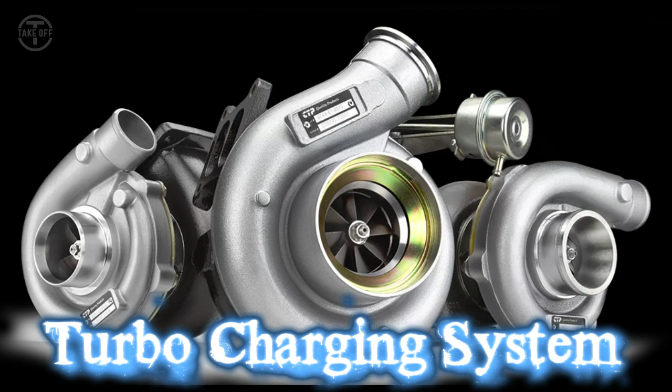Turbocharging is actually a pretty simple concept. The objective here is to convert the energy contained in your exhaust stream, which would normally go to waste, into positive pressure within the intake manifold, forcing air into the engine and thus producing more power.

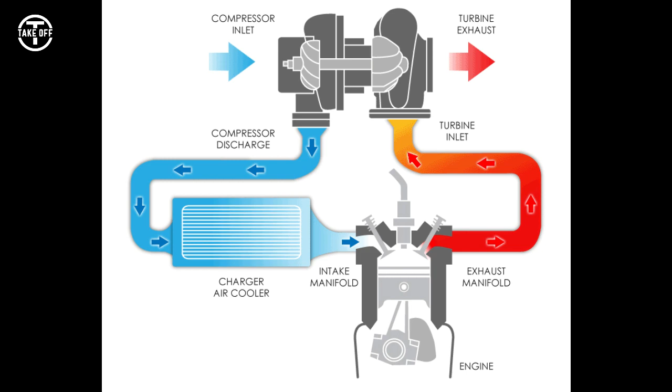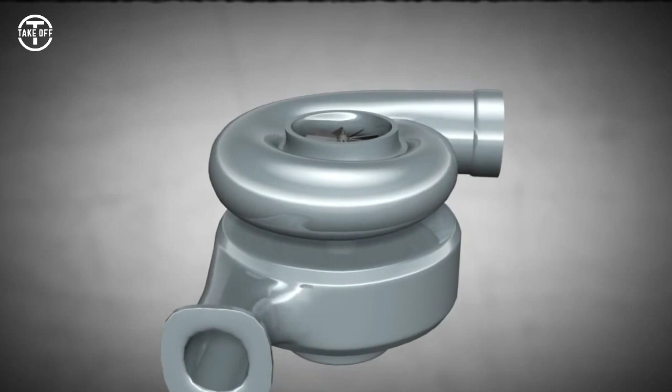The turbine. Basically, the turbine takes excess heat and pressure from the engine and turns it into a force. Without this element, the wheel would not work. There are two different parts of this specific element of the turbocharger. The turbocharger must have the correct turbine.

If the turbine is too small for the engine, it would cause excessive back pressure, ultimately causing the engine to choke and lose power. If the turbine is too large, it will lag greatly and make it difficult for the booster going forward.

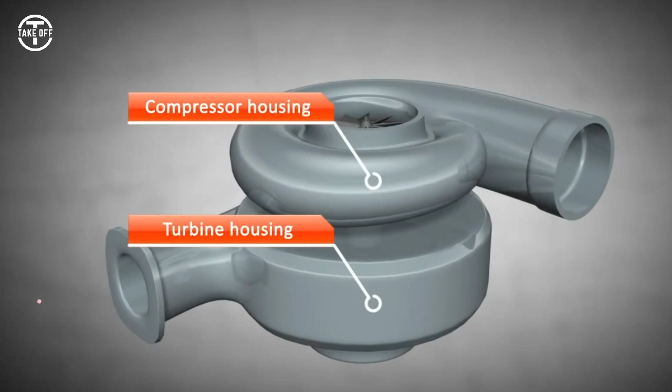The compressor. The compressor is one of the most common elements of the turbocharger that people know and understand. It's made up of two parts, the compressor wheel and compressor cover. Ultimately, what these two parts do is compress the air and move it into the throttle body.

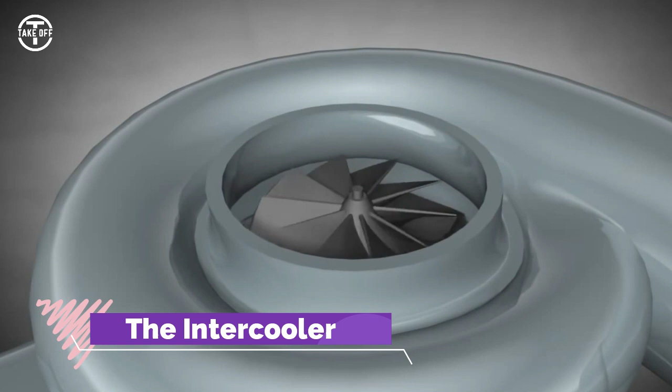The intercooler. This element is extremely important. The entire turbocharger product wouldn't be able to work correctly and safely without it. Basically, what the intercooler does is cool down the turbocharger's pressured air at intake. This is necessary because when the pressure increases, heat is created. An abundance of issues would occur, and too much heat can be harmful and dangerous.

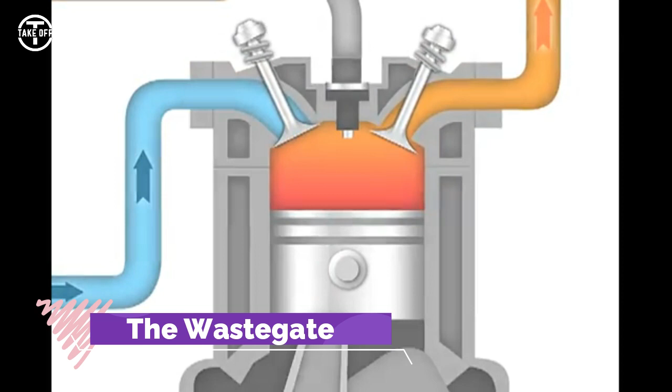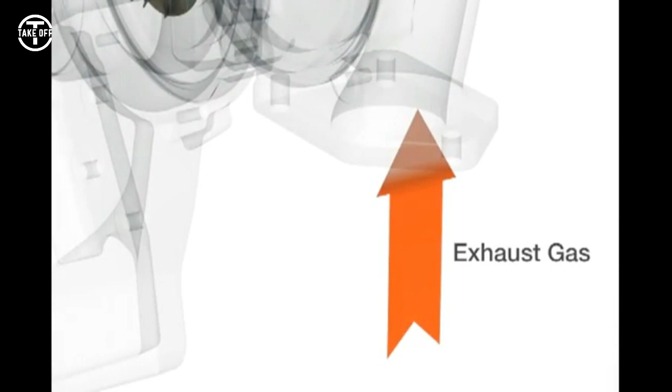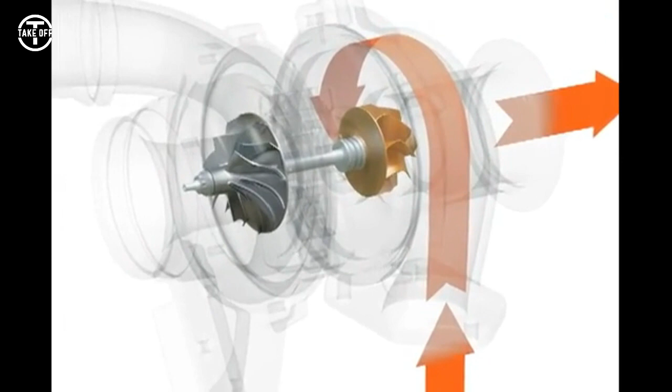The wastegate. Another important element of the turbocharger is the wastegate. The wastegate allows for the regulation and flow of the exhaust gases, as well as the diversion of the exhaust gases to regulate turbine speed. When this is done, it also regulates the rotating speed of the compressor. Fundamentally, without the wastegate, the turbocharger wouldn't work properly.

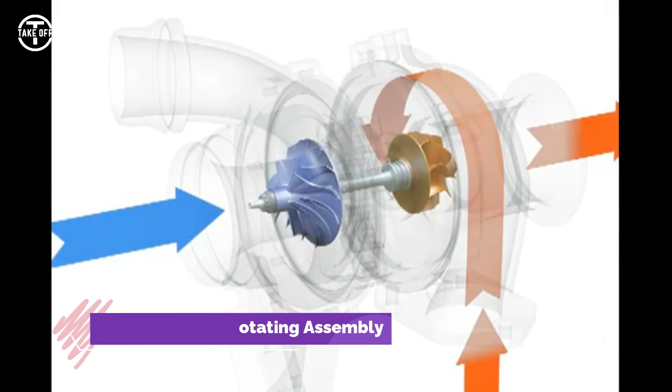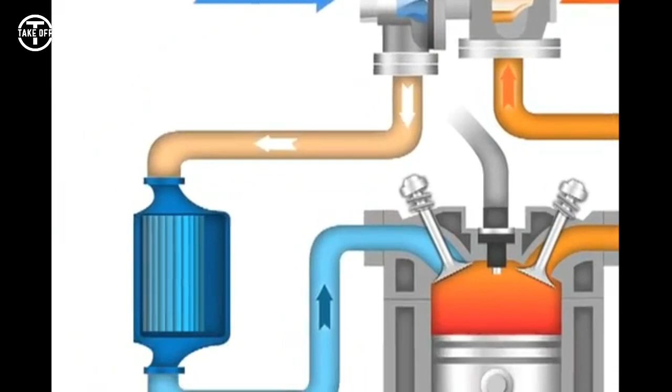Center housing rotating assembly. The center housing rotating assembly, or the heart of the turbocharger, is also known as the CHRA. The CHRA is one of the most critical parts of the turbocharger. This element serves as the mounting point for both housings. With this being said, it must be made of heavy-duty or substantial material in order to do the job correctly and not be damaged by heat or turbine stress.

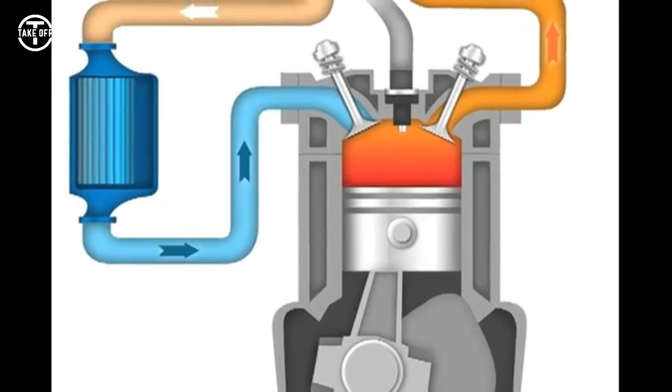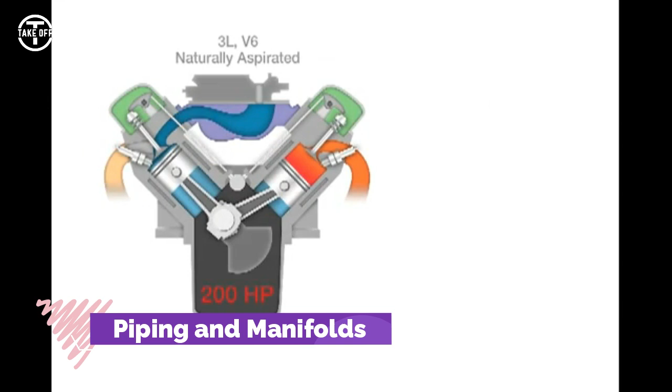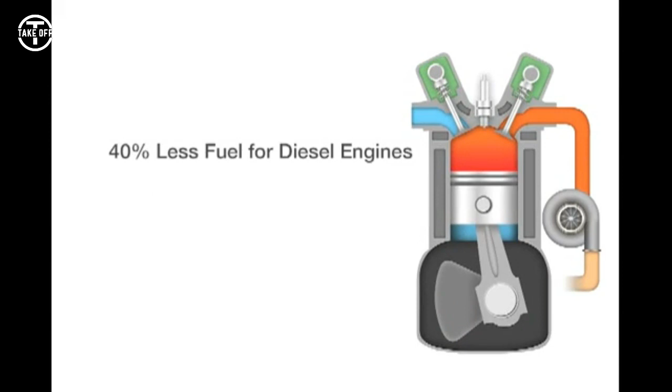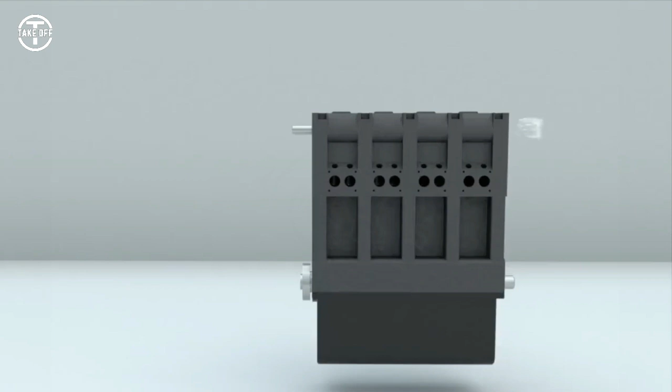Piping and manifolds. Three different sections fall into this category. These categories include manifolds, the hot side, and the cold side. They are combined of pipes and runners that collect the exhaust gases and tunnel them into a merge collector. Due to the extreme temperature change, back pressure, and high stress, these need to be built and sized correctly. If they're not, the pipes and runners won't work, causing issues within the whole turbocharger.

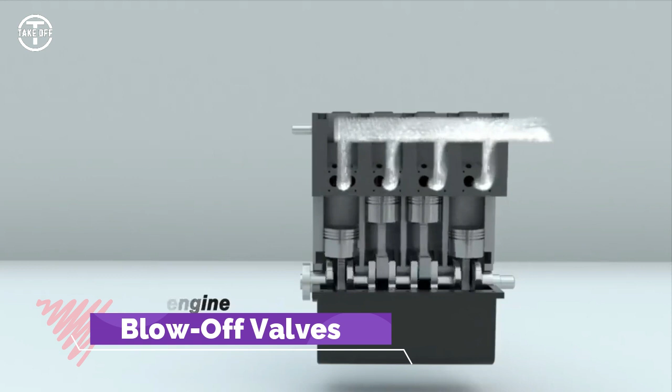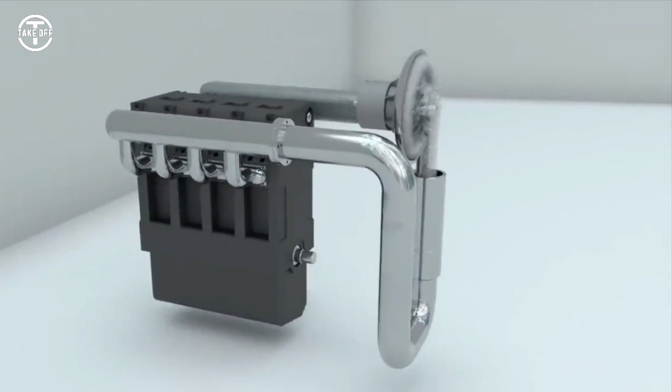Blow-off valves. This element, known as the blow-off valve, is located on the compressor side of the turbo system. The blow-off valve relieves pressure from the turbocharger. After the throttle blade shuts, the blow-off valve dismisses the excess pressure. It just has one simple job, but it's a necessary component.

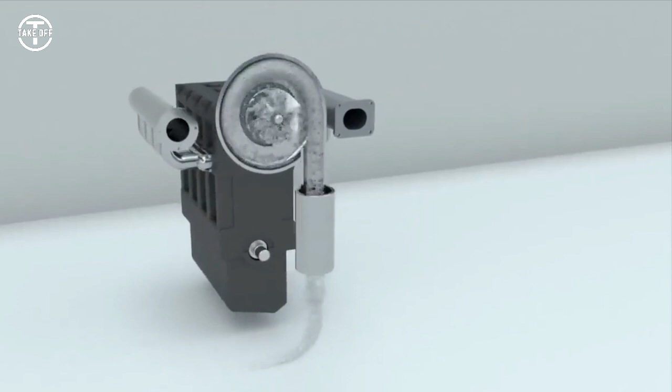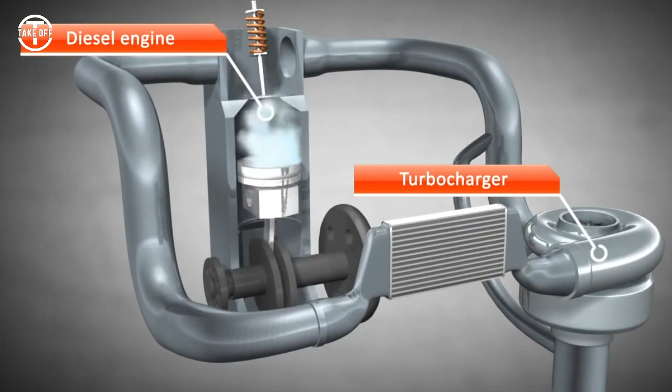Hot side piping. Gases move both from and to the turbocharger, and they move through something called hot side piping. Because of the harsh temperature of the gases when transferring the exhaust, hot side pipes must be made of strong material. If this isn't done, the piping won't withstand the heat accumulated during the transfer. Stainless steel is recommended for this process.

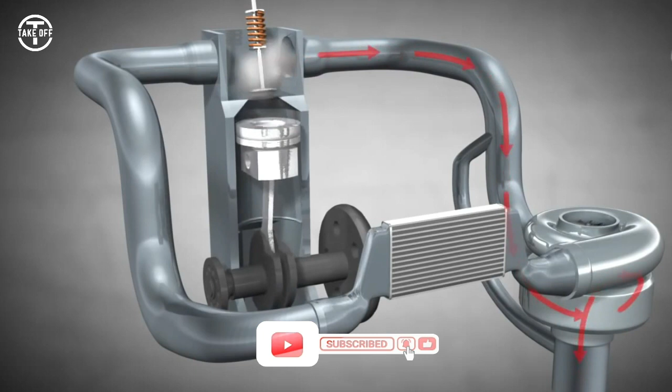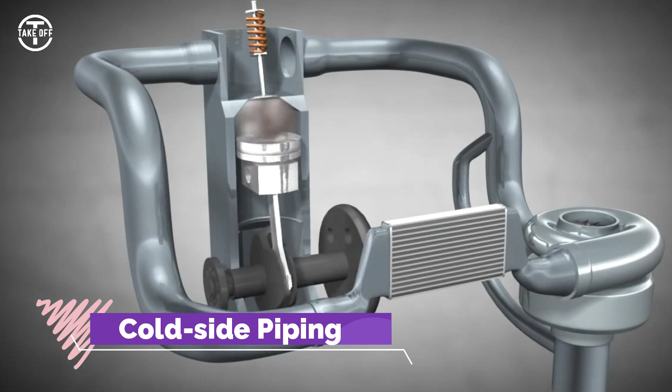Cold side piping. Cold side piping is any of the piping that moves compressed air from the turbocharger to the throttle body. The intercooler that we discussed above would fall into this cold side piping area. This is another aspect of the turbocharger that tries to reduce and regulate heat.

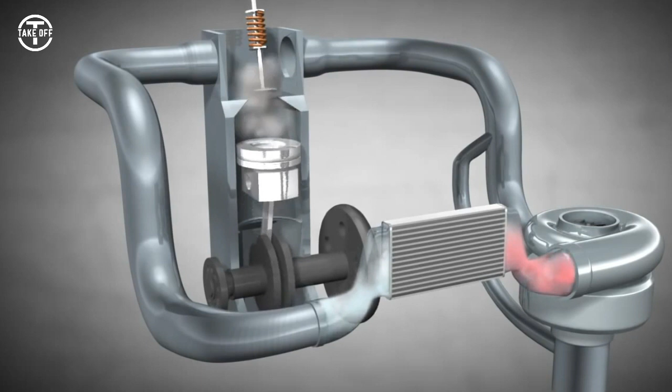The world of turbocharging has about as much variety as engine layouts. Let's take a look at the different styles. 1. Single turbo. 2. Twin turbo. 3. Twin scroll turbo. 4. Variable geometry turbo. 5. Variable twin scroll turbo. 6. Electric turbo.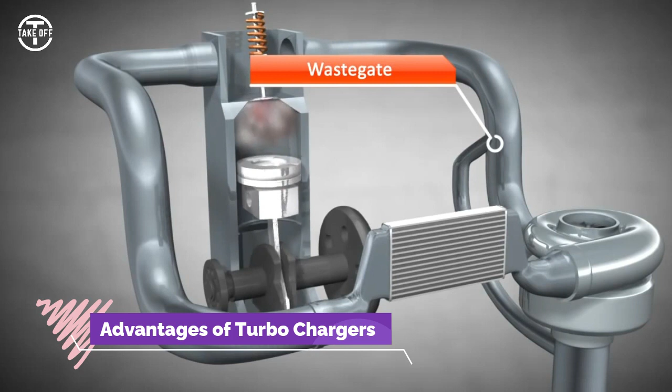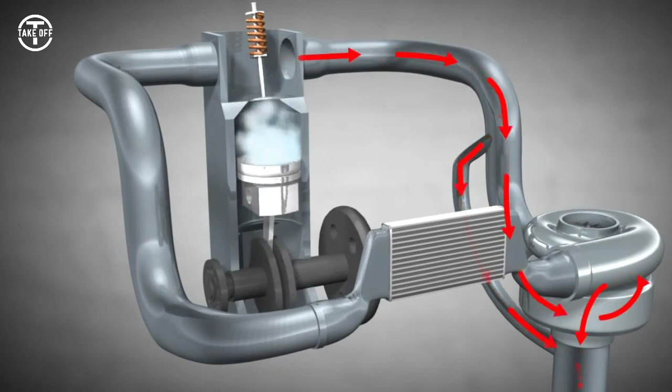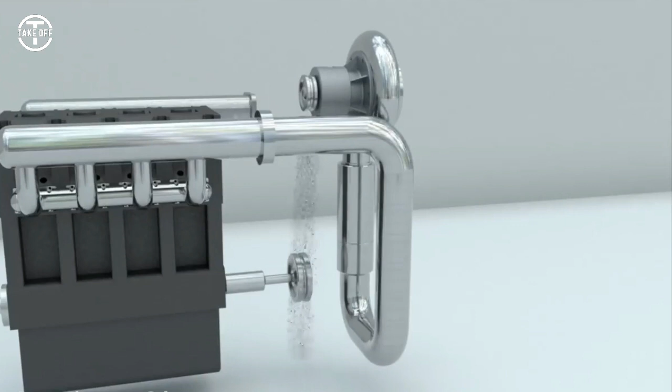What are the advantages and disadvantages of turbochargers? Advantages of turbochargers: 1. Improved torque at low RPM in the case of diesel engines, and over a whole speed range in the case of petrol engines. 2. Better mixing of air and petrol in the case of petrol engines, resulting in effective pollution control. 3. The engine runs smoother and quieter. 4. Reduces diesel knock. 5. Ease in starting from cold. 6. Less smoke during low-speed acceleration. 7. Improved horsepower in the case of both petrol and diesel engines.

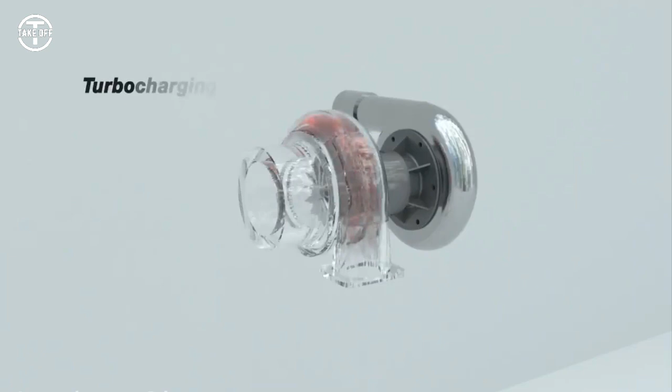Disadvantages: 1. Entails a better cooling system. 2. Design becomes expensive and complicated. 3. Wear and tear is at a faster rate.

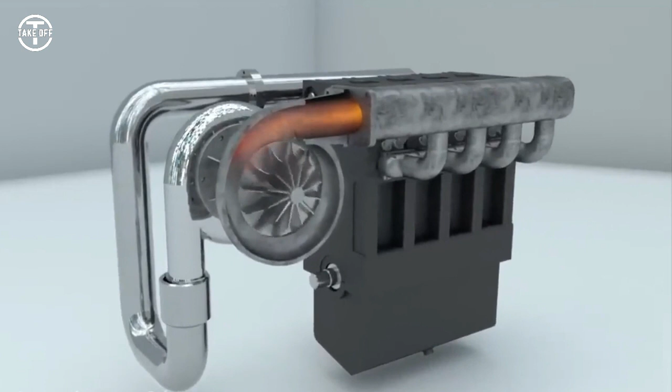How do you install a turbo on a non-turbo car? Installing a turbo on a non-turbo car is going to take a lot more than just plugging in a new part. That said, it is possible to add a turbocharger to just about any naturally aspirated (NASP) engine. But here's why you should think twice. Turbocharged engines don't just take in air differently than NASP engines, they do everything differently.

Adding a turbocharger means cooling the compressed air, modifying the ECU, upgrading your clutch, possibly upgrading your fuel pump. Keep in mind, if you're able to tune everything just right, you might be able to get a little more horsepower out of your NASP engine, but the extra strain on your engine will likely cause it to deteriorate faster.

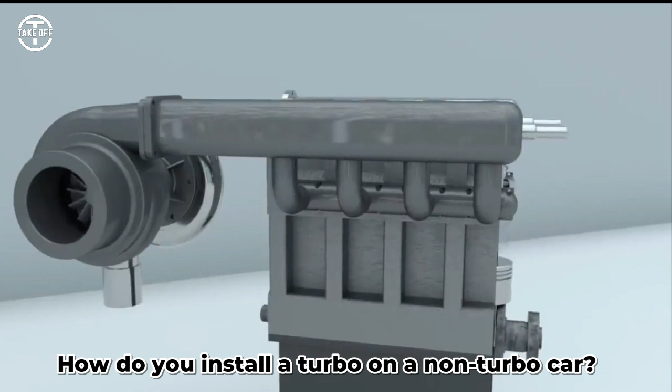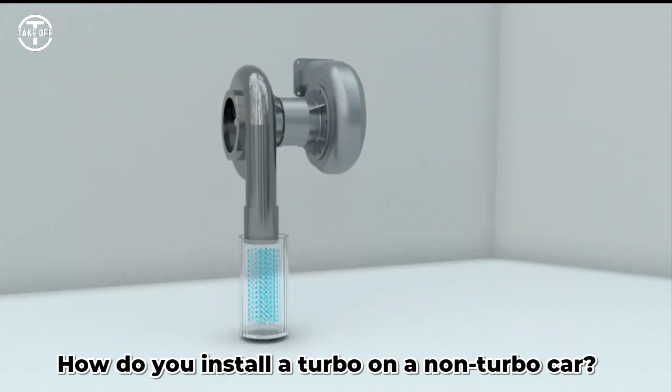Pro tip: a few companies, like Flyin' Miata, have tried to simplify the process with a complete turbo kit, but it's still a very labor-intensive process. You'd be better served both in performance and dollars spent to source a turbocharged engine and have your mechanic install it. This can get expensive, but you'll definitely get more bang for your buck.